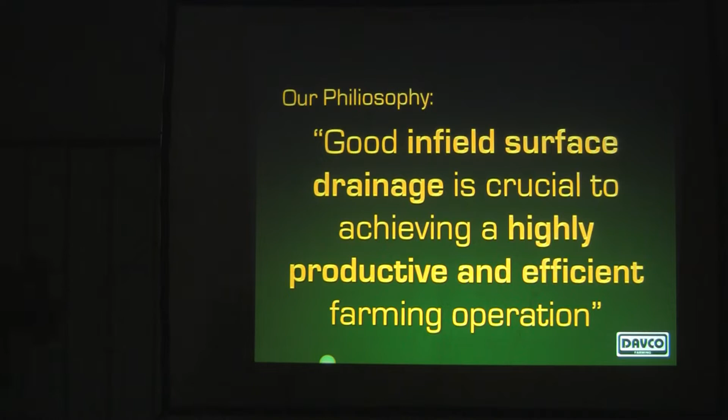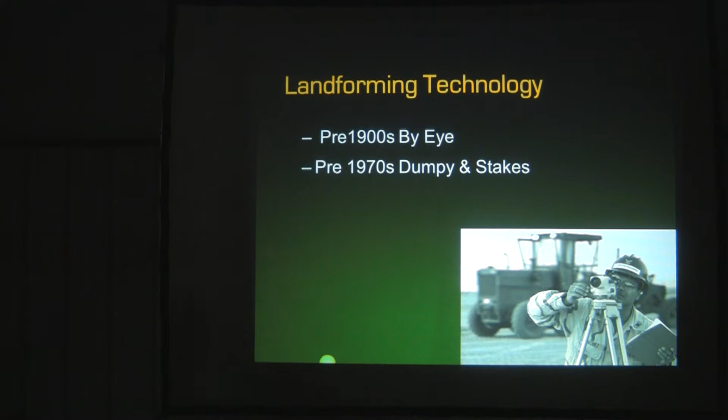I'll say I was born at just the right time, I believe. Our country, we would have struggled to have developed it with grade stakes. It's pretty poor soil, powdery topsoil, and lots of dust while you're landforming. To go out there and attempt to put grade stakes in, the first thing that happens is the grade stakes stake the tyres, and then you knock them over in the dust because you can't see where you're going. There wasn't going to be a lot of our land developed with dumpy and grade stakes.

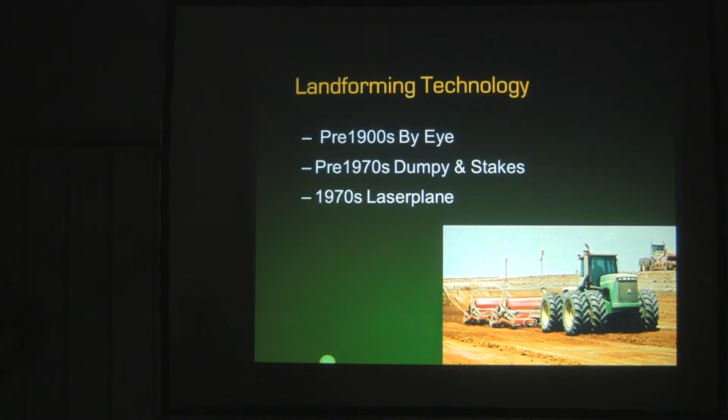But just at the right time, lasers came in for me, and as I say, I was extremely pleased with the laser concept. But then we needed to be able to change the grade. We know with the varying slopes on the farm, we did need to change the grades to try and lessen the amount of earth shift.

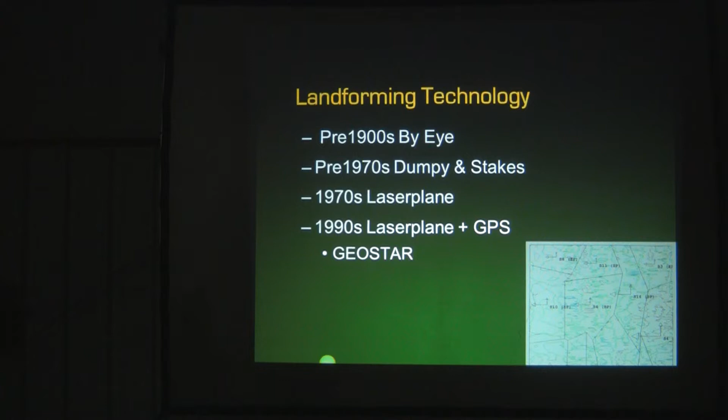So, after I did that a few times, I said there must be something better.

This is a shot of our irrigation. Our furrows, I try and make them all 1 kilometre long—that's 5/8 of a mile. We're all sugarcane. I would have liked this shot to have gone out a bit further. I'm what we call a controlled traffic fanatic.

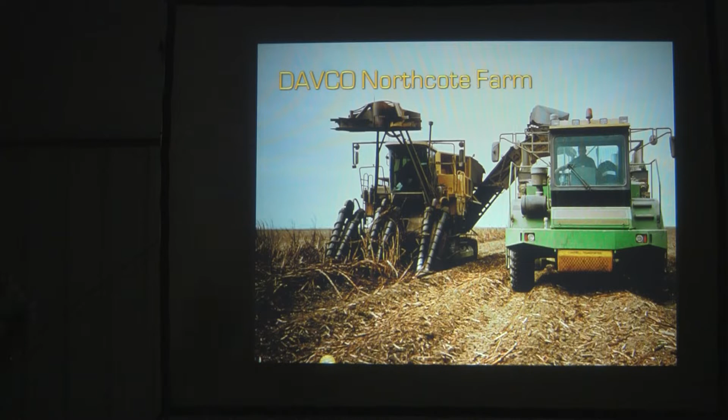In row cropping, there's two ways of reducing compaction. One's by putting great big tyres on to increase the surface contact with the ground so you have less pressure per square inch, but over a much bigger area. The other concept that's increasingly coming in is what we call controlled traffic, where we put very narrow tyres or rubber belts onto zones with GPS guidance, and we compact those little traffic zones.

Mine are 20 inches wide. I currently grow cane at 1.5 metre centres, but all my equipment that goes into the field has the wheels 3 metres apart, just a bit under 10 feet. So that's a traffic zone, this furrow is a non-traffic zone—traffic zone, non-traffic, then the harvester jumps into the traffic, misses one and goes into traffic. So we're compacting, in our situation, about theoretically 16% of the soil surface. In the world sugar industry, that's a record. No one else achieves that.

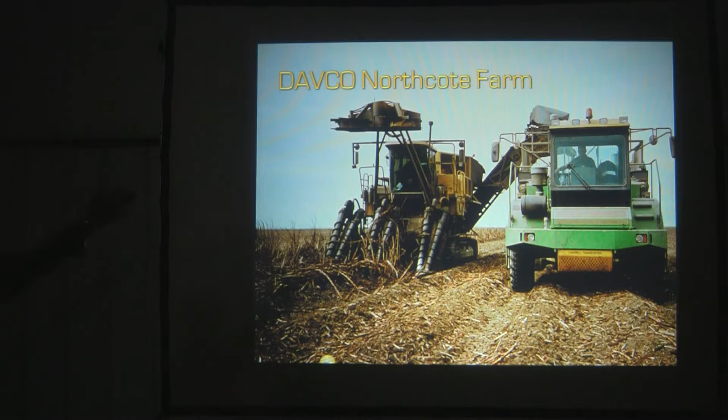With laser levelling, we do remove topsoil, varying amounts of topsoil. In our soil type, there's very shallow soils - fairly good in the top 6 or 8 inches, but pretty poor under that. So it's pretty important for us not to shift topsoil.

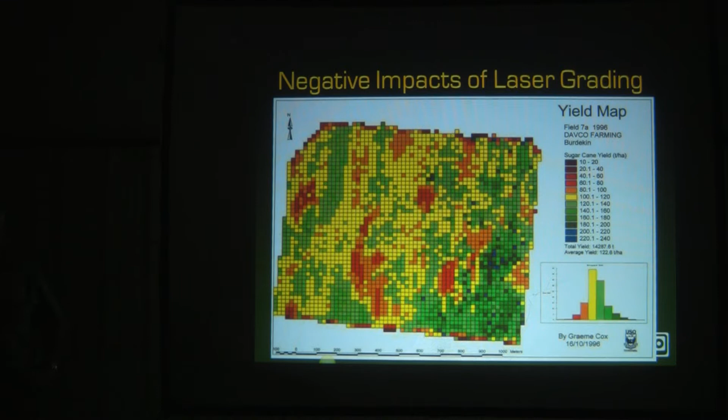But when you look at the histogram of how much bad soil there is and where the good is, there's not a real lot of bad areas. So instead of putting those average amounts of soil conditioners on the whole block, we now target the biggest amount on these red zones - talking in tonnes per hectare, about 14 tonnes per hectare, something around 6, 7, 8 tonnes per acre on these zones, then cut these back to just 1 or 2 tonnes per acre.

The catalyst to design this product was when I purchased this property - 10,000 acres inside the tree line, with very shallow soils. So instead of having straight line grades that laser gives you, even with multiplane putting hinges in there - the Earth's surface isn't straight line, it's everywhere either slightly convex or slightly concave.

So I had this dream of being able to come up with a program that allowed the design to smooth the surface but not make it into a billiard table.

The experience I had on that previous block we levelled, that had the damaged areas we shifted - I'm going to talk in cubic metres a hectare, it's 2.5 to 1, but it's not the number that's important, it's the relativity. On the whole of my farm, about 6,000 acres of sugarcane, I shifted about 400 cubic metres per hectare average. If I put my whole farm through an OptiSurface design now, I would have shifted about 150.

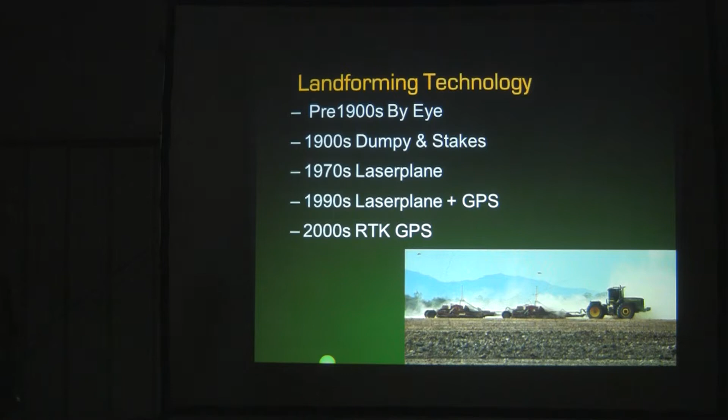Okay, I'm going to hand over to Graeme, and I'll contribute a little bit along the way when the opportunity presents. I'll put this speaker on and hopefully be able to hear a bit better my Australian accent. Before we go on, are there any questions for Dave at this point? No? Okay. I can't see if you're falling asleep, so if you feel a bit drowsy, just put your hand up and ask a silly question.

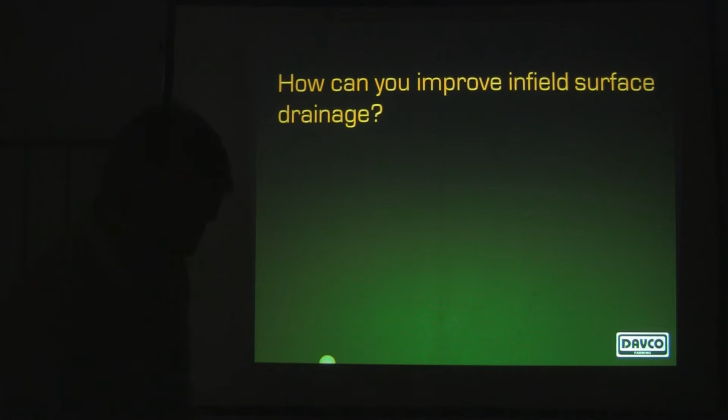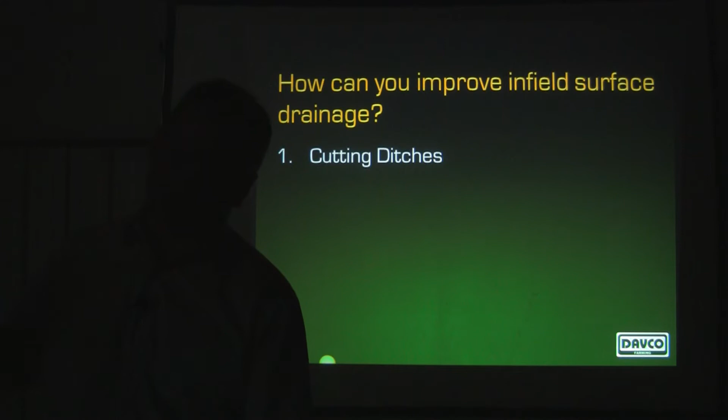Okay, so I'm just going to go through a bit more background, I guess, about the concept before we look at some case studies. So, I guess we focus on surface drainage, solving surface drainage with this product, rather than irrigation, which lasering has traditionally been for. OptiSurface works with irrigation as well, but we see the big market is actually dryland agriculture. But it has applications for irrigation.

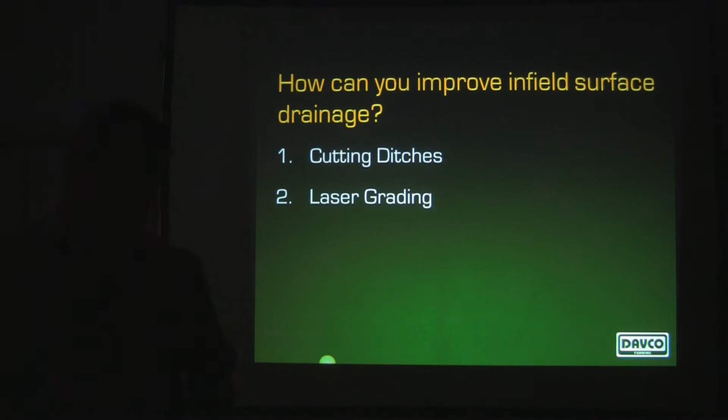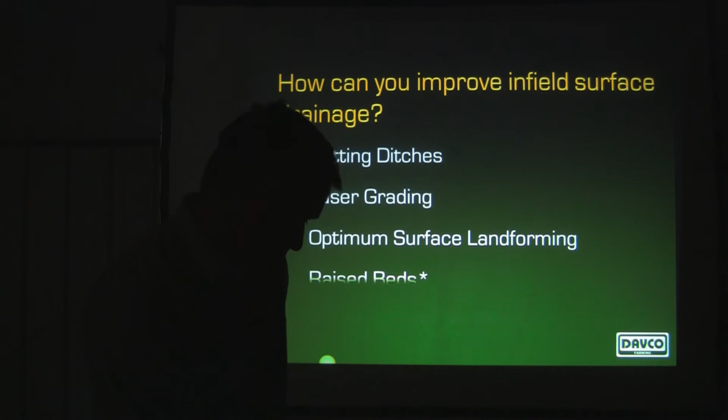So, how can you improve infield surface drainage? You can cut ditches through a field, which a lot of people do. You can do laser grading. Now you can do optimum surface landforming. You can also put in raised beds to improve the micro drainage. You've got to be careful when you put in raised beds. You can actually create more ponding in your field than without the raised beds, because it restricts the water flowing sideways across the raised beds. With landforming, you can make sure that the land's always falling in the direction of the raised beds. So landforming complements raised beds. It makes sure they drain to the end of the furrow.

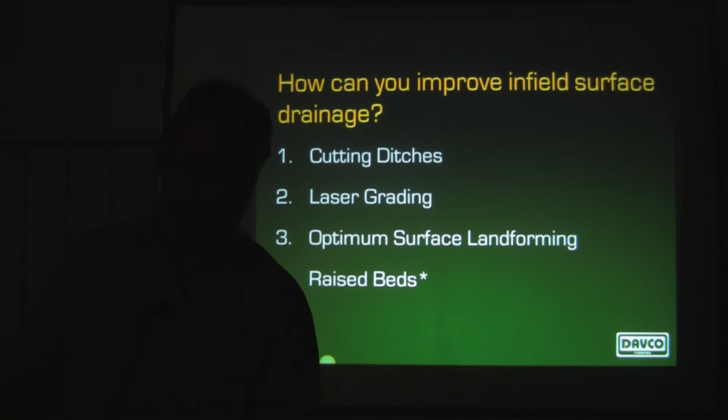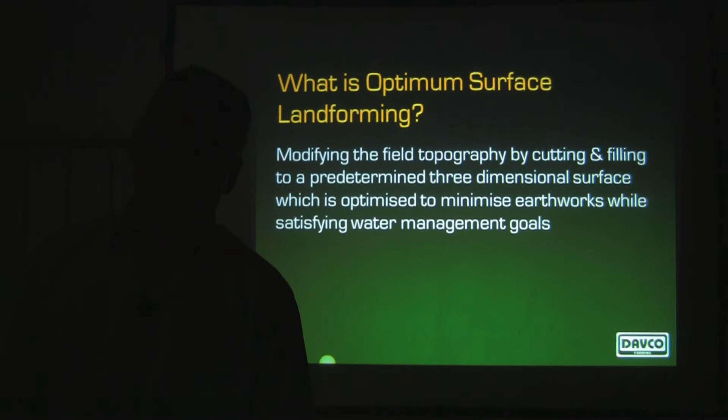Okay, so what is optimum surface landforming? Just so we can nail it down a bit more, it's modifying the field topography by cutting and filling to a predetermined three-dimensional surface, which is optimised to minimise the earthworks while satisfying water management goals. Very similar to laser grading. The difference is that we're using a curved three-dimensional surface, not single plane type designs or multiple plane designs.

Terminology: land planing is when you smooth the surface without any design grades. Laser levelling, in my mind, is when you're levelling dead flat to zero grade. Laser grading is when you're lasering to a grade. And optimum surface landforming is this 3D curved surface.

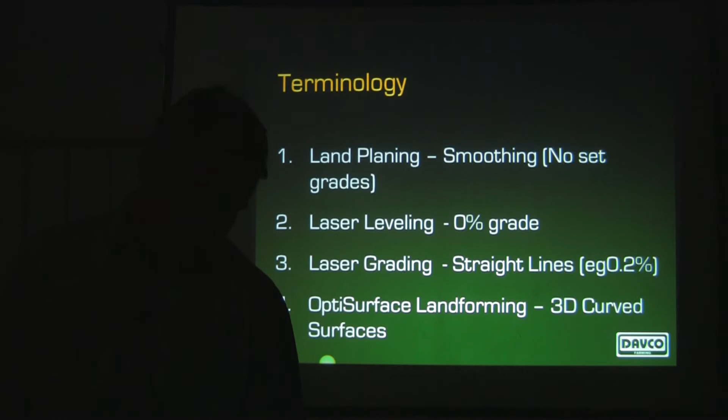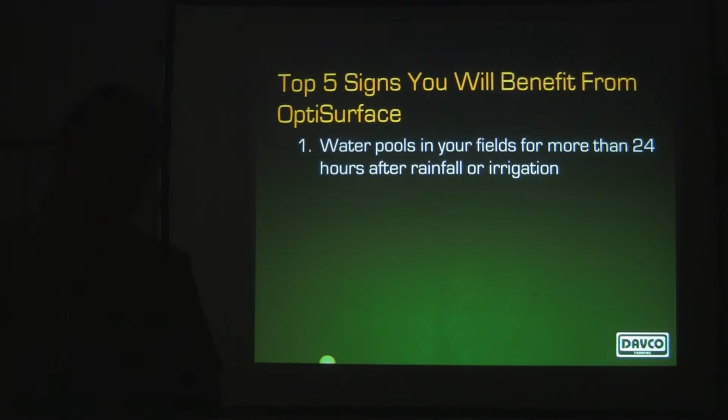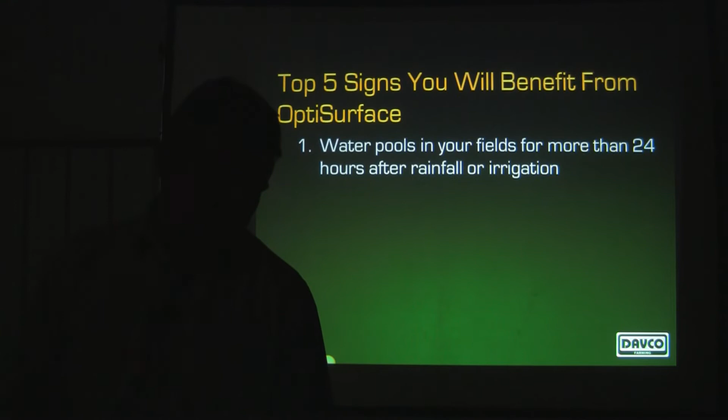5 signs you'll benefit from OptiSurface. If water pools in your field for more than 24 hours after a rainfall or irrigation event, then you're probably waterlogging your crops. You want to get that water off. Rice is a different story, and I won't pretend to know anything about rice. You guys are the experts in it. But we're really talking about other crops here that don't like standing water. Not to say that you can't get benefits in rice production from OptiSurface, which we'll discuss a bit later, about smoothing levees out and stuff like that.

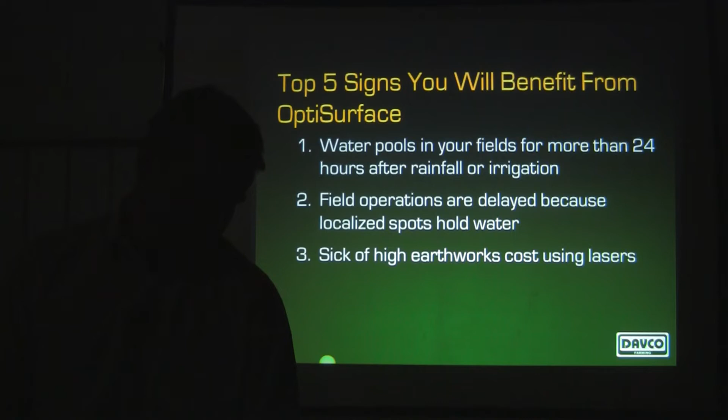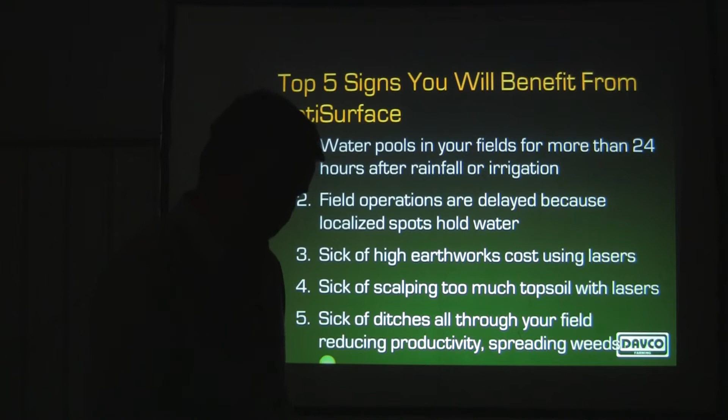Field operations are delayed because localised spots hold water. Even if you've only got 5% of your field holding water, it can delay your planting and spraying and harvesting dates, which can cost you money on that field, more than the waterlogging in the localised areas to some extent. If you're sick of high earthworks using lasers. Number 4, if you're sick of scalping too much topsoil with lasers. Number 5, if you're sick of ditching all through your field, reducing productivity, spreading weeds, etc.

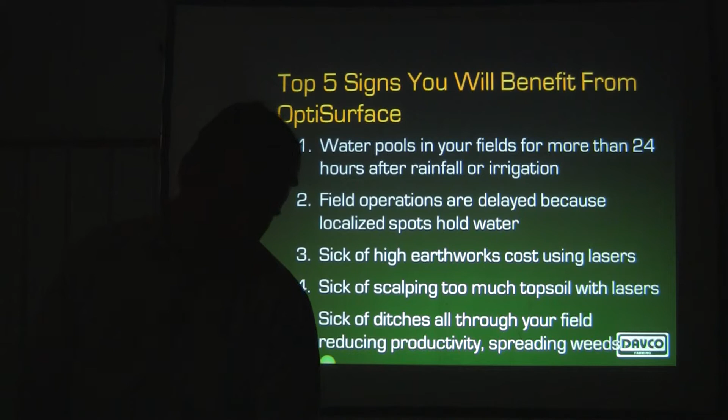I guess we advocate that landforming is a better option for improving surface drainage rather than ditching, because of some negative aspects of ditching in terms of damage to machinery and stuff like that.

Okay, just the comparison between laser designs versus OptiSurface type designs. Now these numbers change from field to field, of course, but just to give you an idea of the kind of differences that we see. These numbers also change as your fields get larger. These numbers usually go up because you're trying to fit a surface to a large curved field or something like that. But typically, if you fit a single plane to a field with a slope, you might end up with 250 to 750 cubic yards per acre.

I've seen some designs over the weekend where you guys are shifting a lot more soil than that in places, and you could argue that there's benefits to shifting a lot more soil to get efficient field layouts as well. So yeah, rice is a bit different, but we'll keep going.

Multiplane, if you split that same field up into multiple planes, then you might get the earthworks down quite significantly usually, say down to 150 to 375 cubic yards per acre. And then if you do the same field with OptiSurface, because it allows more flexibility in the slopes, you can get those earthworks right down a lot lower.

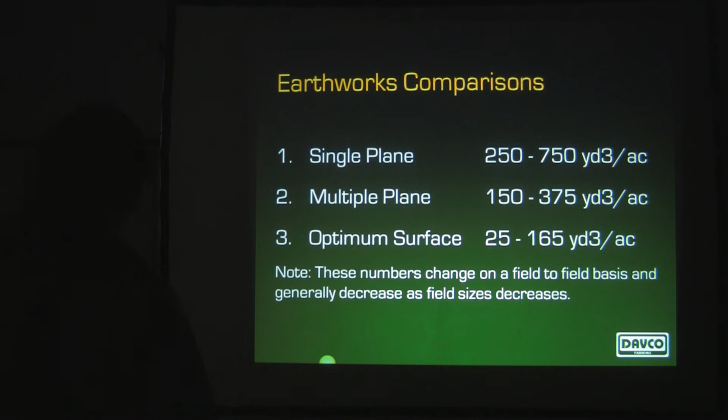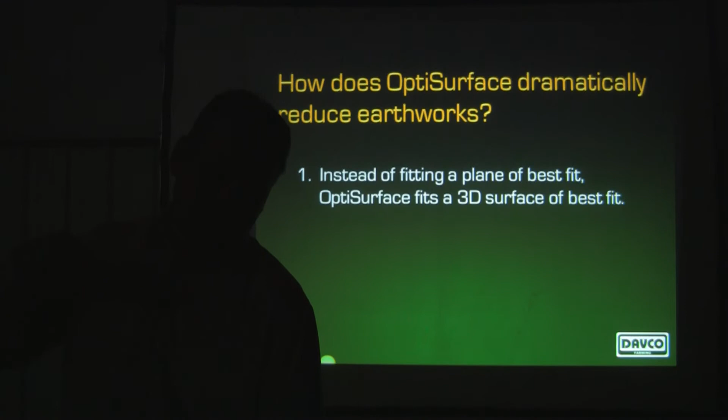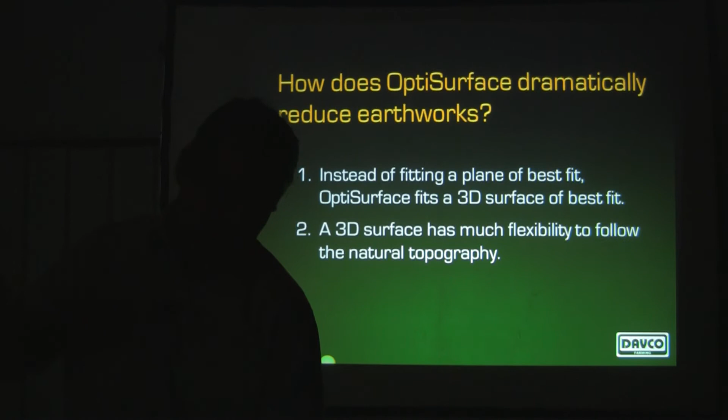So how does OptiSurface dramatically reduce earthworks? Well, instead of fitting a plane of best fit, OptiSurface fits a three-dimensional surface of best fit. So if you've done a laser grading design, you import your topography, you tell the software to calculate the plane of best fit, and it'll come up with a surface. In OptiSurface, it's very similar, except you tell OptiSurface the slopes that you'll accept in the field and a few other parameters, but we'll have a look at that a bit later.

A 3D surface is much more flexible to follow the natural topography than a plane, as you can imagine. A lot of fields have concave and convex slopes in them, so you're trying to fit this laser plane through it. It doesn't lend to following natural topography. But with OptiSurface, you can make it as flat or as undulating as you want. And it's up to you to decide how much earth you want to shift, basically, to achieve your objectives.

Often you don't need single grades for drainage or surface irrigation. Everyone thinks to get efficient furrow irrigation, you need a single grade. It's not true. Slope is not the most important factor in getting a uniform irrigation. And for drainage, definitely not. It's even less. If you're just trying to get water off your field, so there's no ponding, you definitely don't need a single grade to do that.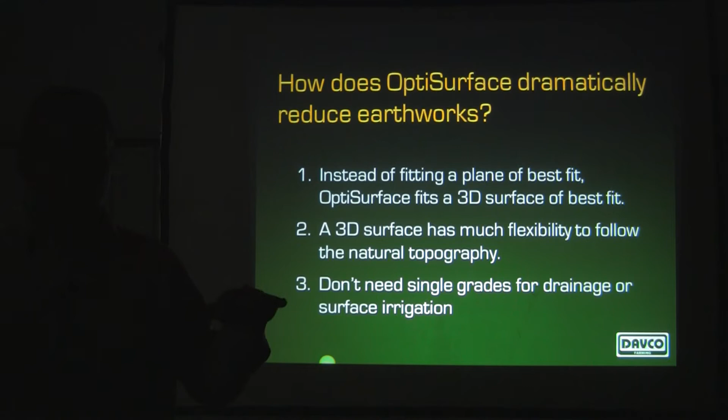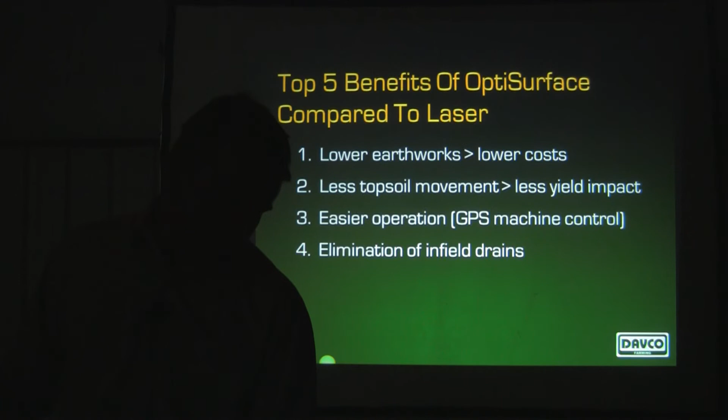5 benefits of OptiSurface compared to laser: lower earthworks, lower cost, less topsoil movement, a big driver, less yield impact in those areas. Or if you're topsoil stripping, with OptiSurface designs you have to strip less topsoil effectively. Easier operation. This is more to do with the GPS machine control side of it, not OptiSurface. Drains. You get better field layouts, so you can be more flexible on achieving a layout that might be better for machinery productivity, stuff like that.

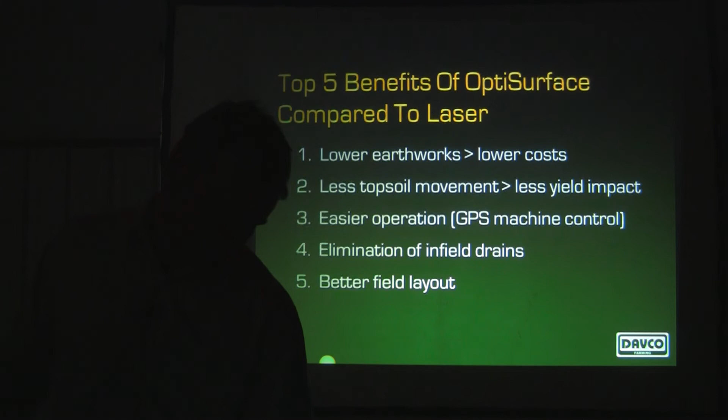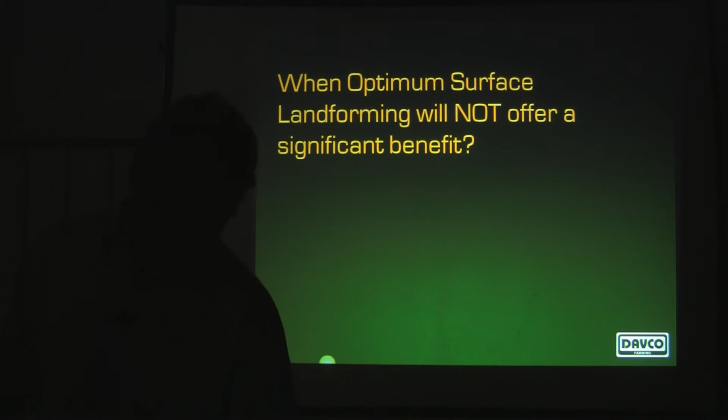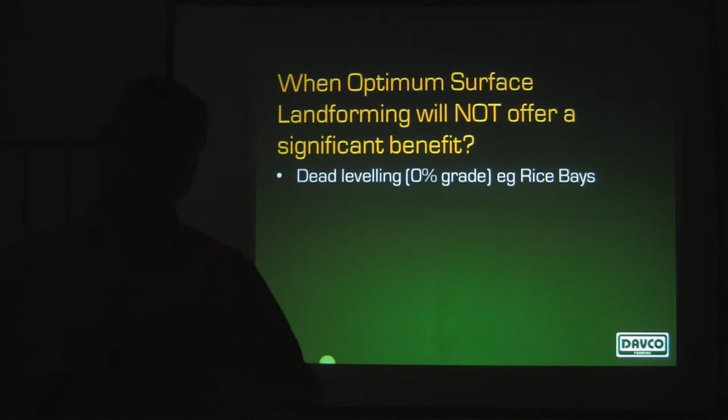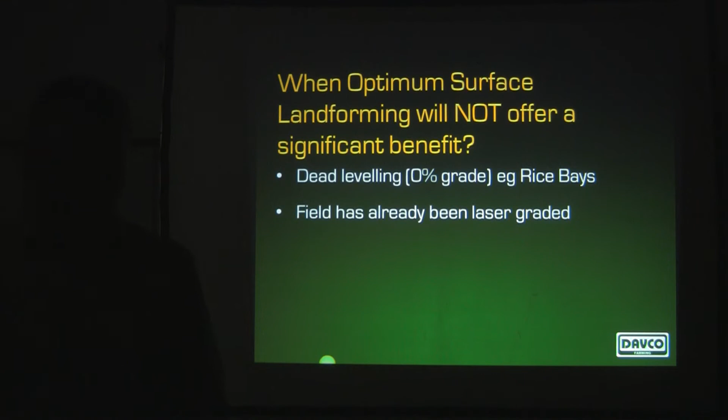So when will OptiSurface not offer a significant benefit? If you're dead levelling a rice bay, then OptiSurface has no benefit because it's just a single plane on zero grade. GPS machine control can offer benefits, but the concept of curved surfaces isn't going to offer you any benefit at all. If your field has already been laser graded, then putting an OptiSurface design over it will do fine, but you won't see earthworks any different to someone sat there with the laser design program and copied the previous design slopes.

If you're cutting against the natural grade for some reason, you want to run water into a hill because that's the only way you can run it, then OptiSurface will just end up with a design somewhat similar to a laser grade design, because you'll just end up going that minimum grade into the hill.

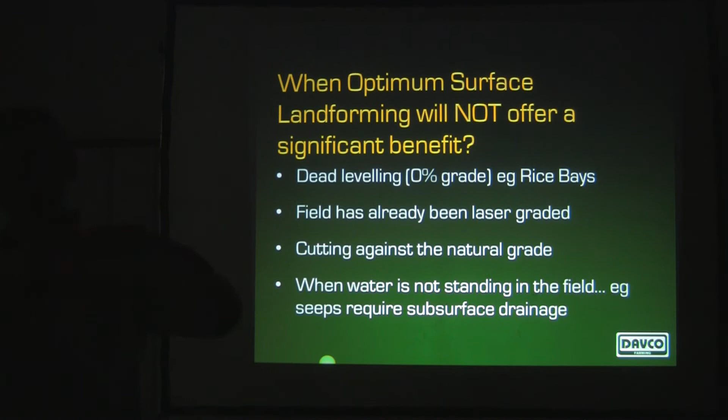If water's not standing in your field, I guess this is targeted at the Midwest of the US, where they have a lot of subsurface drainage because water infiltrates the soil, runs down the slopes and then pops out as a seep or like a spring halfway down the slope. That waterlogging can only be solved by subsurface drainage, tiling. OptiSurface is all about surface drainage, so making sure the water has nowhere to pool on the surface.

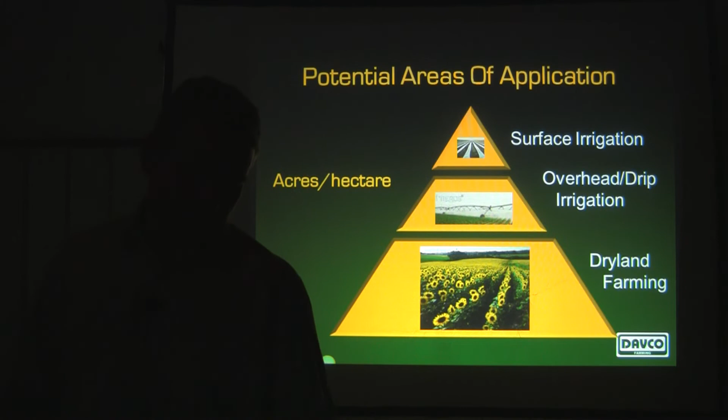Potential areas of application. It's definitely got applications in surface irrigation. But I think the bigger markets are probably heading towards overhead and drip irrigation, where you still want good surface drainage, but you definitely don't need single grades to achieve that. And then dry land farming, where you're not irrigating but you have drainage problems. I guess around here you guys are irrigating just about 100% of your land anyway, so that's not applicable. We're kind of looking at the top end of this graph.

Okay, I think next we'll go through a case study on a field, just to show you how it works. Any questions before we move on?

I've just got a question: how many people do actual multiplane designs on their land rather than one? Okay, there's a few of you there. I'll just throw in, where Graeme said there's no real benefit for a laser plane design, there is for a multiplane design, because if we put your multiplane design into OptiSurface, it will combine all those sections and make it look like just one big section. And there's a fairly substantial benefit.

Where you do a multiplane design, you come to a hinge. It is a straight line and then it goes off. Now it might be subtle, but because of the delay in the hydraulics, where the join is, where the hinge is, if you're going that direction, it will leave just a little bit more soil on top of the knob. That isn't really distinguishable. You probably wouldn't notice that even though it's there.

But what you will notice is where it changes grade at the bottom. Because when it's going that direction and it changes to go up, it generally will just have a little delay and take a little scoop out of this side. So you end up with a little pool of water just there. So there is a benefit for multiplane design going to OptiSurface. Okay, thanks.

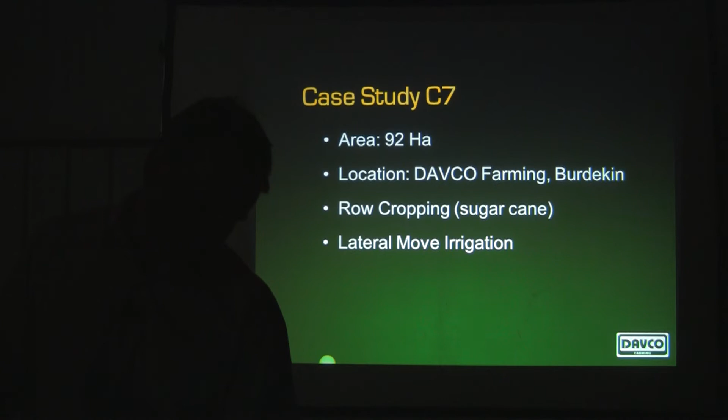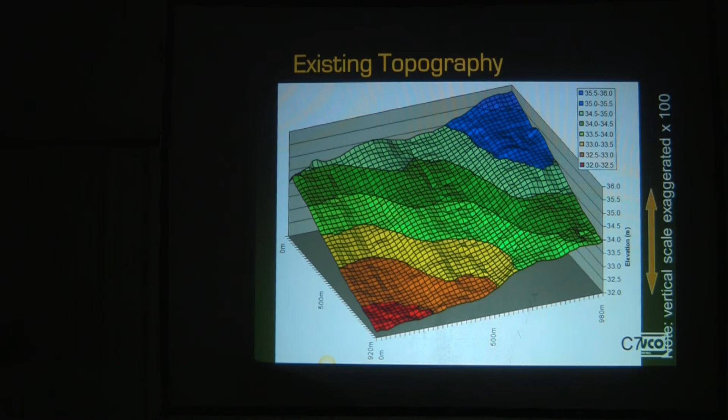You'd think that may drain pretty well as it is, and it does drain. But if we went in there and just put drip irrigation in without doing any landforming, and then you put your beds up this high, then quite a significant proportion of this field will pond water after rainfall in the furrows, which is what we don't want. So we have to do landforming to make sure it drains.

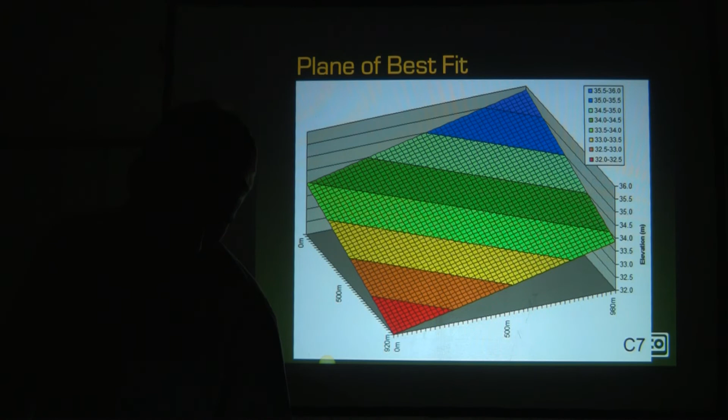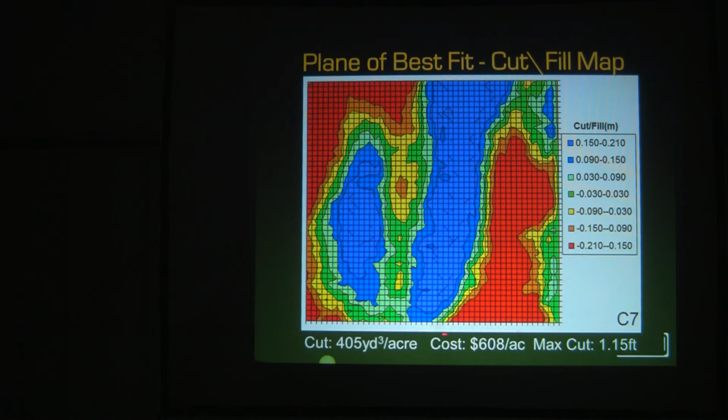If you fit a plane of best fit, that's what it'll look like through the field. If you look at the cut fill map for that plane of best fit, red areas are more than half a foot of cut, blue areas more than half a foot of fill. So the average earthworks are about 405 cubic yards per acre, and maximum cut about 1 foot. At $1.50 a cubic yard, that's about $600 per acre.

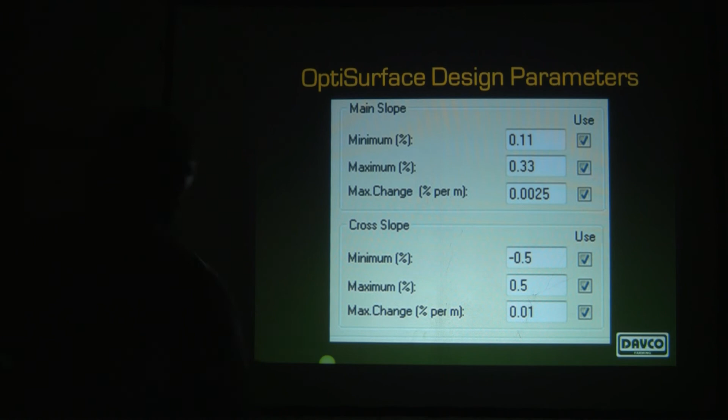And we press calculate on the software, and it goes around and calculates the OptiSurface, the optimum surface. So you can see it looks very similar to the natural topography, but it has done a bit of cutting and filling to ensure that we get good drainage on this field.

So this is the cut fill map for that OptiSurface design. The legend's the same here. So red's half a foot of cut. We don't even get up to half a foot of fill. Oh yeah, there's a tiny bit there. So the earthworks come down by about 75%.

So dramatically reduced earthworks. That cost is probably underestimated, because the cost doesn't come directly down, because you still have to run over that field a number of times. But yeah, that's just under a foot of cut there. So we didn't reduce... there's a point down here that has to be cut off.

But you can see the green area is only plus or minus an inch out of grade. So just a light, what we call a trim, will cover all the other areas, and then we're just shifting some soil around. Now, if we're worried about topsoil, we might want to strip these red areas off before we cut those areas. You can imagine if we only have to strip these red areas compared to the red area on the previous cut fill map, we'll be saving a heap of time and money.

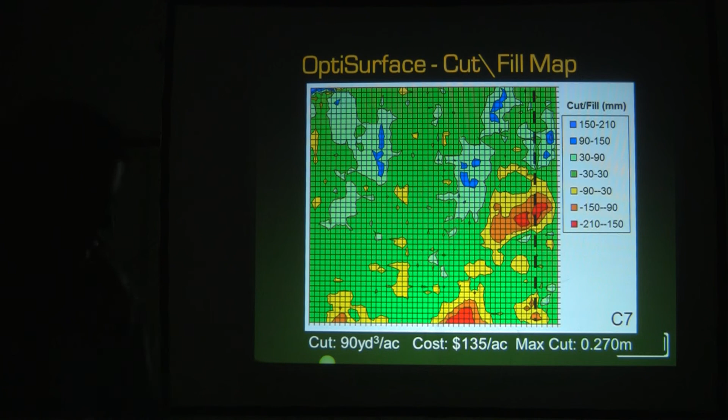So that's the previous cut fill map. So you can see the difference in the red areas is dramatic. A good way to get a better feel for OptiSurface is looking at long section profiles. So this is a long section down that black line here. So you see the black is the existing topography, and the red is the OptiSurface proposed topography.

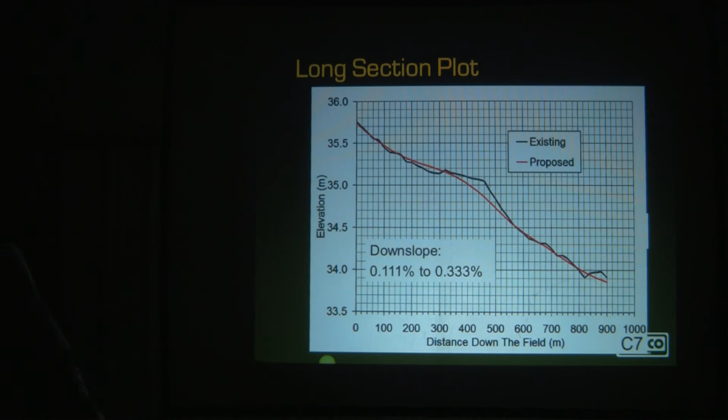So you can see there's a little ridge kind of knob in the middle of the field. The OptiSurface design follows the natural topography as close as it can, and then rises up to try and get over it, and then drops back down. That was our maximum slope settings. If we loosen these off, so we have a lower minimum slope and a higher maximum, we can follow that natural topography more closely and then get the earthworks down even further.

So if we take the slopes down to 0.05, so half a tenth to 10 tenths, you can see it's really closely following the natural topography, just making sure that we get rid of these little areas of pond water. Earthworks, that's 90 cubic metres a hectare. It's actually about half that for cubic yards, so it's about 45. So we halve the earthworks by loosening our slope inputs.

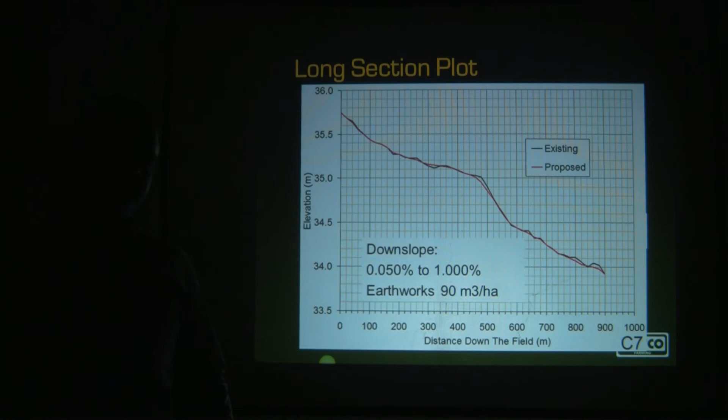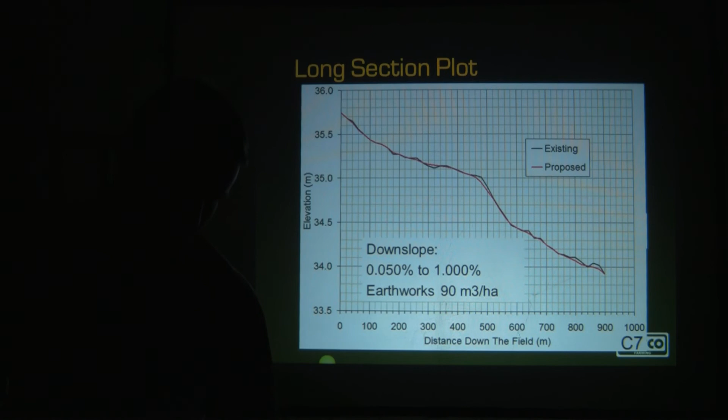Yep. What is the 0.05% slope in relation to what we call tenths of a foot? Yeah, half a tenth. That's a half a tenth? Half a tenth, yeah. Okay. So 0.1% is a tenth. Okay. So generally, half a tenth is as low as we'll go for trying to get drainage. A tenth, we'd probably prefer a bit steeper than that, for good drainage.

Okay, so OptiSurface also has some options for different surface types. One is row drainage. We call it OptiSurface 1D for one directional drainage. So it's row drainage in one direction only. So if you're furrow irrigating and you want the water to flow from one end of the furrow to the other end, then that's OptiSurface 1D. That's the surface type you'd use.

If you're, say, growing soybeans on beds, but you're irrigating with a lateral move or a centre pivot, you may be happy for the water to drain out either end of the furrow, not out one end, and that's called OptiSurface 2D. So row drainage in two directions. If you've got a ridge in the middle of the field, the water can run out either end.

That's OptiSurface 2D. And then OptiSurface 4D, this is four-direction drainage. So the water can drain in any direction as long as it leaves the field. So that's for things like growing wheat on the flat, or corn on the flat, where we just want to make sure there's no depressions in the field that'll hold water, and the water will just meander its way off.

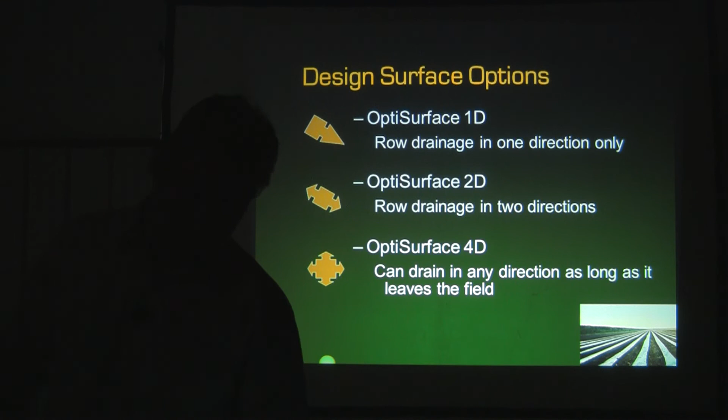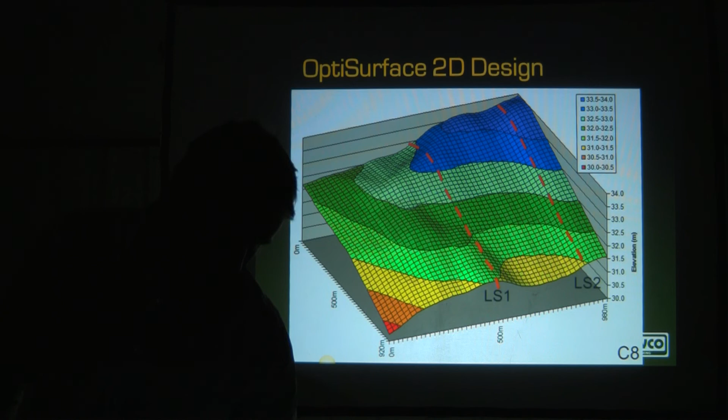So this is a case study on another field just near the previous one, where we'll look at 2D and 4D analysis. So if we do a 2D design over this field, naturally there's this little ridge that runs down here, so it might be easier to drain the water back this way and have it drain down here rather than trying to fill this area up and make it drain down this

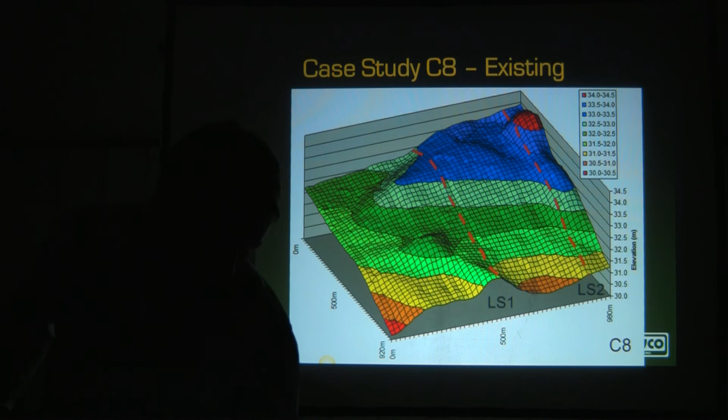irrigating, then you could run your poly pipe down that ridge and then irrigate it both ways. Yeah, there's a little knob here, there's some ridges here, so in this case, the water's going to drain down the furrows again, but it's going to drain in this area here back that way.

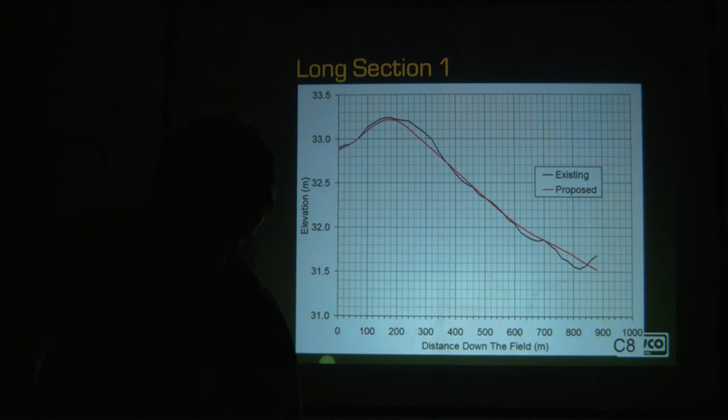And that's a long section through one of those points. You can see it's rolling both ways. Now, this is an OptiSurface 4D design, so we're not growing rice. You could apply this to rice too, actually. But it's where you don't have any furrows or beds to restrict the water flow. So we're just smoothing out the surface here to make sure there's no areas that hold water.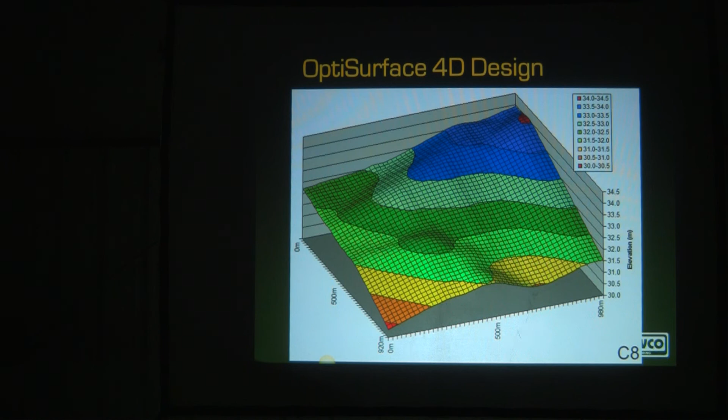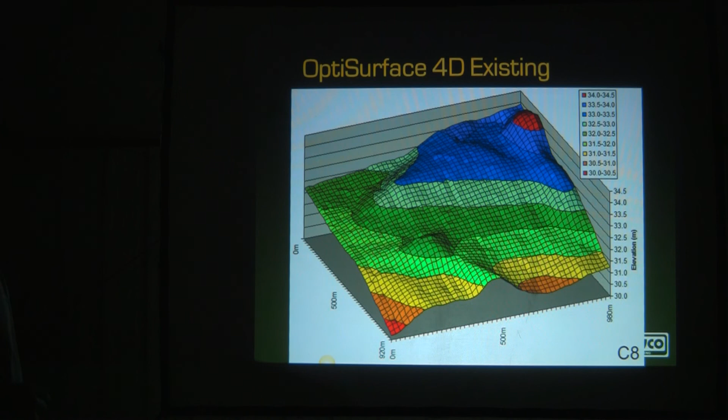And you, yeah. Okay. Yeah, that's just the existing topography beforehand. You just smooth out of it.

Okay. Any questions for Jeff? Has a quick talk about how you get this stuff implemented in the field, machine control. Yes. How about the last slide you had there? Sorry? You go back a couple of slides there? Go back a couple of slides.

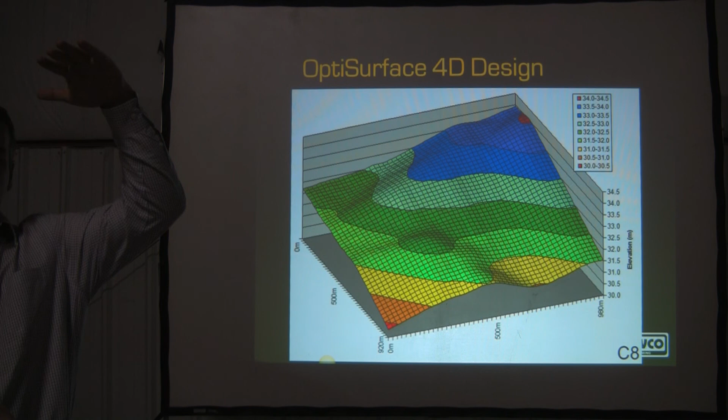Okay, how you plan on watering that old field there? With rice? That's an exaggeration. It's really pretty flat, correct? Is it? You say it's really steep? Hold there. This one here? This hill? I think he's just showing how to get the water off by draining any direction. Is that correct? Yeah.

This is a 4D design. So the goal of a 4D design is to get water off. This is more designed for a dryland field or something that's under a center pivot. You're just trying to get water off the field, whatever direction it goes, by moving this little dirt off. So this one you wouldn't necessarily be watering down a furrow or anything else. We use a different design for that. Well, I mean, you could run levees on those contours. Yeah, you could water, and just water it as you normally water a levee.

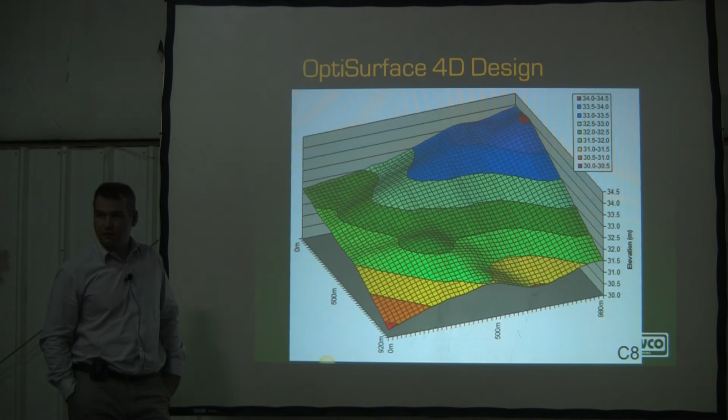I'd just add that, yeah, there's a 100-to-1 vertical exaggeration here. So it looks like it's a mountain, but no, it is significant, 13 feet. But what Graeme was saying, you could imagine that for rice. If we took the block back down, we can do an OptiSurface design and make it the maximum that you are prepared to accept within a bay. Say, just for example, this was one bay.

You just tell the OptiSurface design that the maximum point on the field is a certain elevation, and the minimum down is whatever slope. It might only be 6 inches difference from there to there, just with that sort of different topography within the bay. It means it still drains. At the end, all the water comes out as soon as you let the water out at the lowest point.

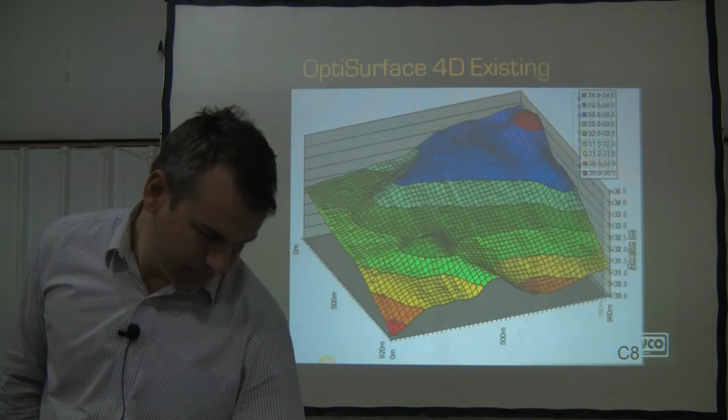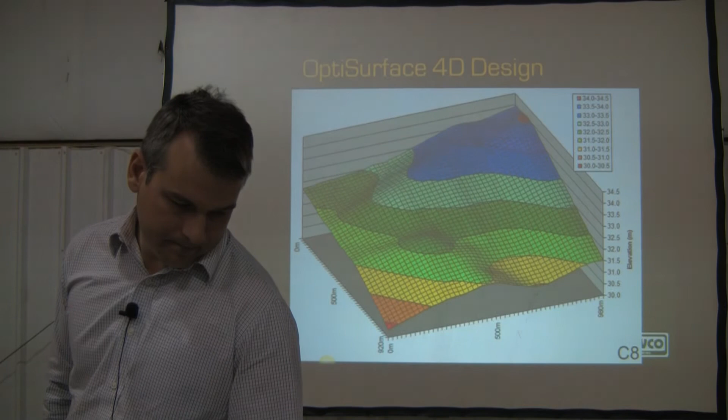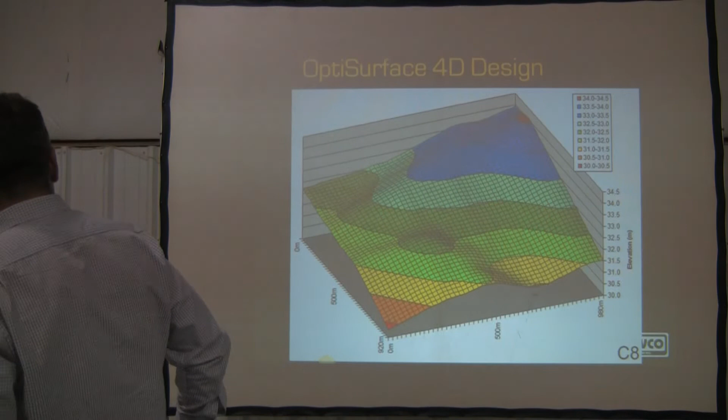Any other questions? Yes? What degree of slope in those contours? The vertical elevation is 31.5 to 32.0 metres. That's half a metre, so a bit over a foot. So, yeah, for rice you've got a lot of levees in there. In terms of slope, naturally that's around 3/10. I think we set the maximum slope on that at 3/10.

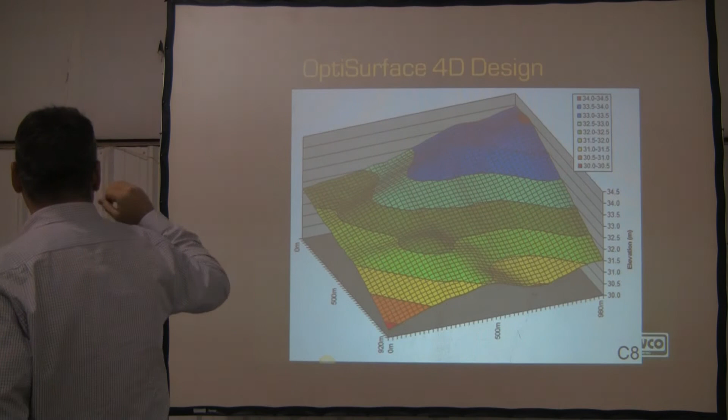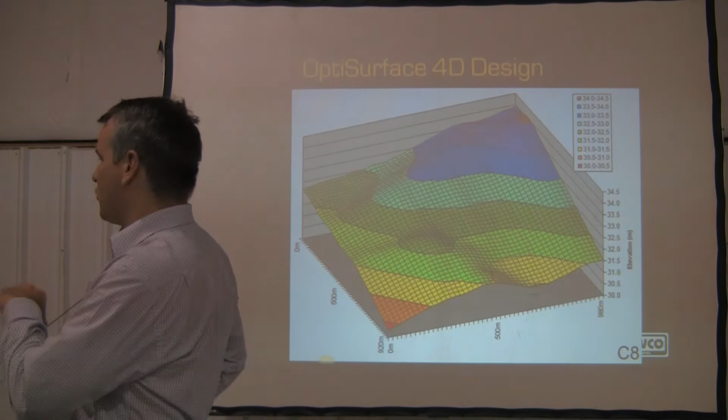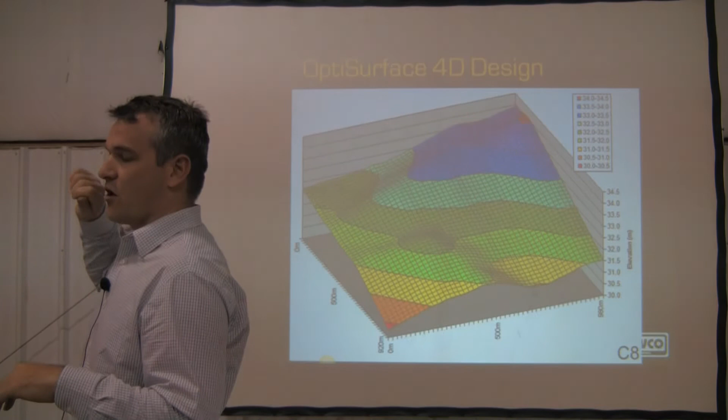So, but you can smooth it. You can smooth OptiSurface as much or as little as you want. So if you want to shift a lot more soil, you just tighten up the smoothing, or reduce the maximum slope. Basically, so you leave the contour of your ground the same, you're just going to smooth it out. Well, with a 4D design, no, you can take. Oh, sorry, 4D design.

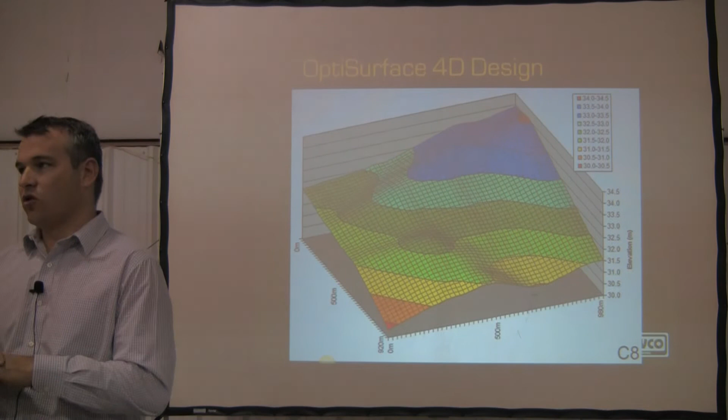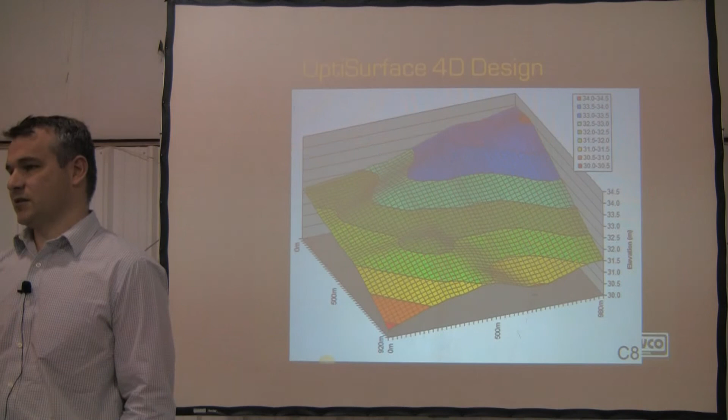Yeah, if you wanted to minimize your dirt moving, you're going to leave your levees contoured the same. You can smooth them out, flatten your whole field, but still remain at that same natural contour. Basically, yes, smooth your levees out, or you can adjust your maximum slope and your minimum slope to approach a single plane. Basically, anywhere in between. Yeah, basically, without a lot of guesswork. And exactly, you're not going to get a place and have different elevation.

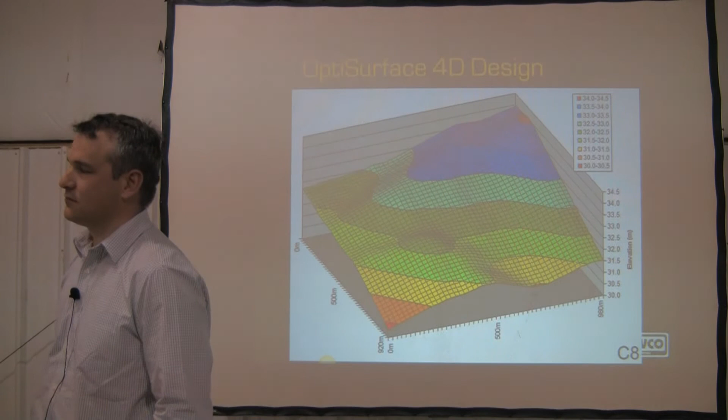I'll add, I'm a farmer that loves square layouts. There's nothing more efficient